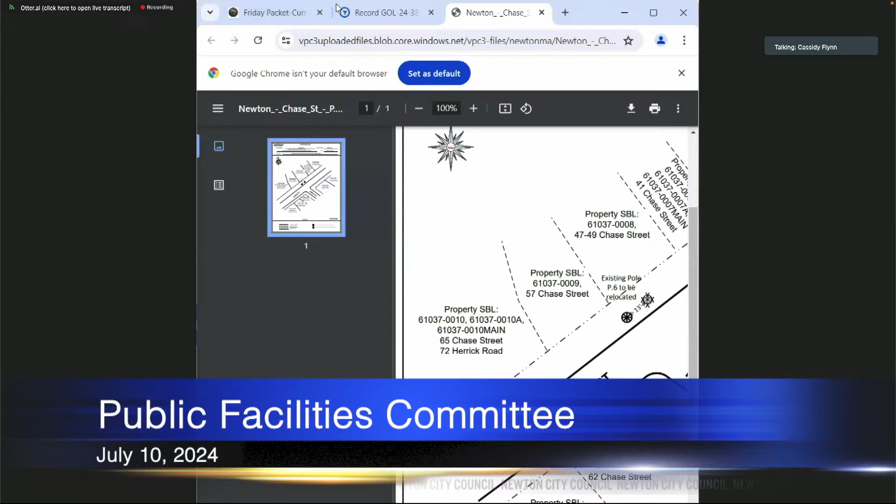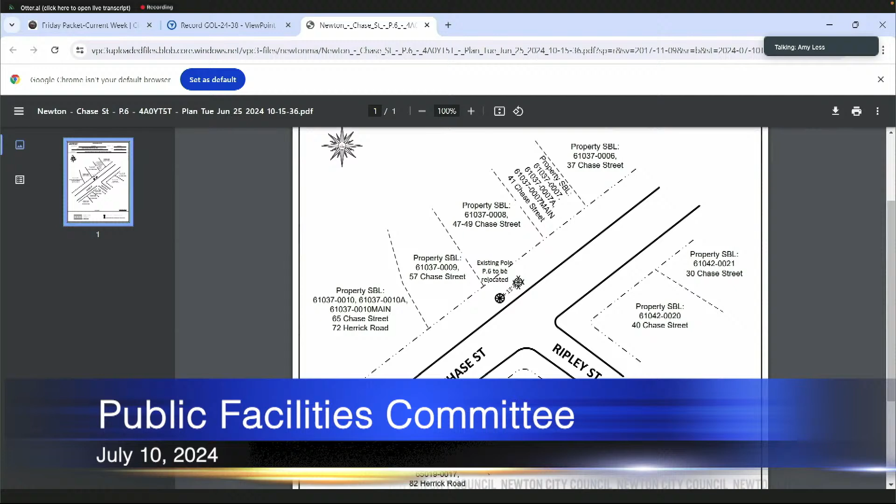It's hard to read, so it's moving further away. It looks like it's moving down to the east, if I'm correct—no, to the west, I mean it's going to the west. So if I'm facing the house, is that to the right or the left? Is it moving towards 41 or away from 41?

I don't know, can you tell from that map which way it's going? There's a little arrow that points—it looks like it's directional. I think it's going towards her house.

Yeah, that's an issue because we already have one that's on the other side of our house, and we really don't want one on each side of our house.

It's moving away. Yeah, I'm moving away? That's what it looks like. Okay, I can't see because it's too far away here. You see the project—is it going to the left or the right of the project?

It's moving away, it looks like it's moving away. It's currently almost across from Ripley and it's moving the other way. Yes, yes, okay. Does she see the screen? Yes, I can. Okay, I can see where it is.

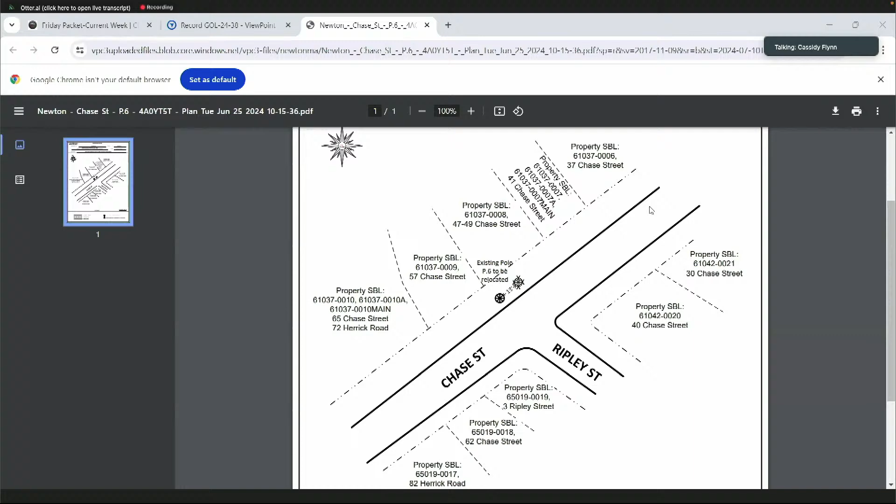Okay, so are you all set? If you're facing the project, it's going to the left. Okay, Alex, did you want to say something else? No, I just wanted to confirm that it is moving to the left and it's still going to stay in front of 47, 49.

So is there anyone else who would like to speak on this particular project? Okay, I think we can close the public hearing and bring it into committee.

And is there anyone that has questions or comments about this? Councilor Danberg. Thank you, Madam Chair.

This is the first I'm hearing about this. I have seen a previous version of this project, and this version has changed considerably. There was no request for movement of any pole in the previous project, and I have not been contacted at all by the developers, and found out via my Friday packet that this was even an issue. So I need to contact other neighbors. I need to know more about this project, and I think the neighbors need to know more about this project.

So I'm going to move to hold on this tonight because I feel that we don't have enough information to move forward. This is not about that project, this is only about moving the telephone pole. Yes, well, the moving of the pole is a part of the project, so I don't feel that we have enough information in order to make the decision on moving the pole, because the pole only needs to be moved in order to accommodate a driveway that has been moved on the project.

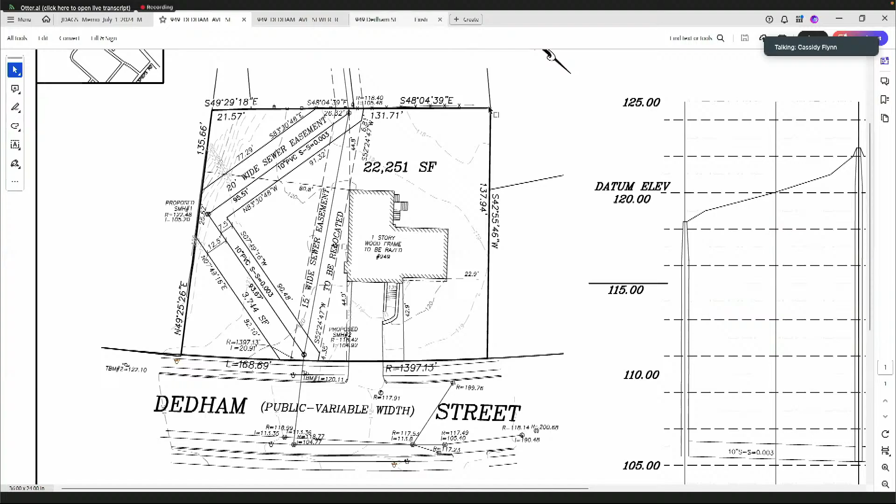Okay. The next item is 293-24, Eversource Energy petitioning for a grant of location to install and maintain approximately 378 feet of conduit westerly from the new manhole MH 32297 at the intersection of Auburn Street and Evergreen Avenue to support the MWRA tunnel boring machine project.

Who is here to speak for this one? Is there somebody here from Eversource? Usually it was Cal.

Mr. Daglian, do you have information on this project? There was backup material. Yeah, sorry about that. Yeah, so Eversource is requesting the location of a manhole and a couple of 100 feet of conduit. The only concern that we have is that DPW just recently installed a raised crossing there.

We asked if the manhole could be moved closer towards the Auburn Street intersection to avoid digging up the raised crossing and to relocate the conduit if they have to go to the pole. If they can't relocate it, then we expect that raised crossing be reconstructed to our standards.

So would you feel comfortable just putting that condition, or should we wait until someone from Eversource is actually in the room? I would be comfortable with that condition. Okay. All right. Councilor Gentile?

So unfortunately, the councilor from Ward 4 is not comfortable with that, just adding that condition. As Mr. Daglian points out, we just literally within the last week totally replaced that traffic calming situation.

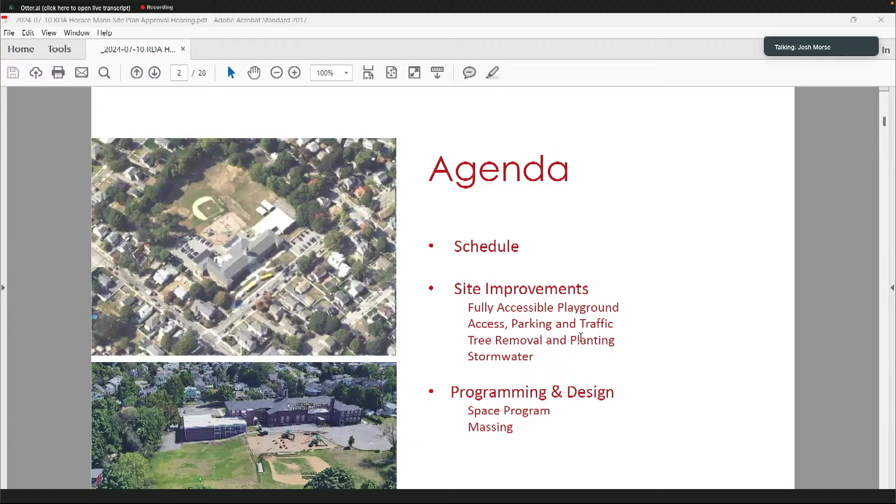I'm actually going to take you through the presentation tonight, and if we get into the weeds too far, I'll kick things over to Steve. So with that, I'm going to share a screen. All right, can everybody see that? Good. I'm doing this in PDF as opposed to PowerPoint because the PowerPoint is pretty large and it buffers a bit. So this evening, we're going to touch upon the schedule, our site improvements, and our program and design.

So overall, our project schedule, where we're at right now, is the red box right here. We are in July of 2024. Provided that the site plan approval process goes smooth, which I hope and believe it will, we will begin our construction documents in October. We will bid the project next February and start construction in April of 2025. Construction will continue through the end of the summer of 2026.

During construction, the Horace Mann School is going to be relocated to 191 Pearl Street, the current Lincoln-Eliot School. This was a process that we worked with the Horace Mann community and staff on, and just recently Superintendent Nolin accepted my recommendation, which was a culmination of a lot of work and input from the building committee and from others, both at Newton Public Schools and my staff. She concurred with that recommendation and presented it to the school committee just in the last couple of weeks.

So we are going to move them temporarily while we're in construction. We're not going to move them this April, just to be clear. We're going to get a jump start on some of the site work. They would move at the end of the summer of 2025. They would be out of 225 Nevada Street, the current Horace Mann School, for one school calendar year. Then we would finish our work the following summer and move them back in advance of the 2026-2027 school year. So that's our project schedule.

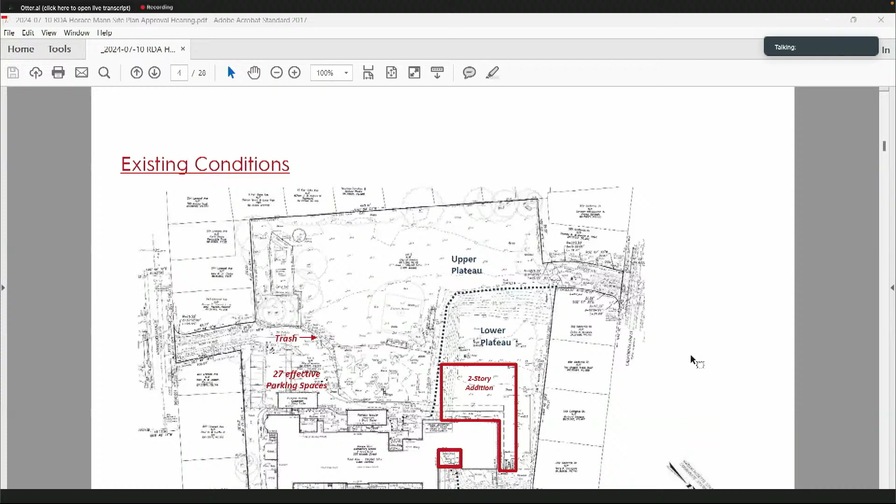So this is our site survey, but really the important part of this slide is it puts in your face where the addition is going to be. We started early on and looked at a lot of different options. It became clear quite early that the best possible location for the addition is what some people refer to as the bowl, if you will. There's a lower portion shown as a lower plateau on the site plan here. The upper plateau is kind of the fields - you can see the baseball diamond. This is the existing playground, the staff parking lot, and this is the rear of the building.

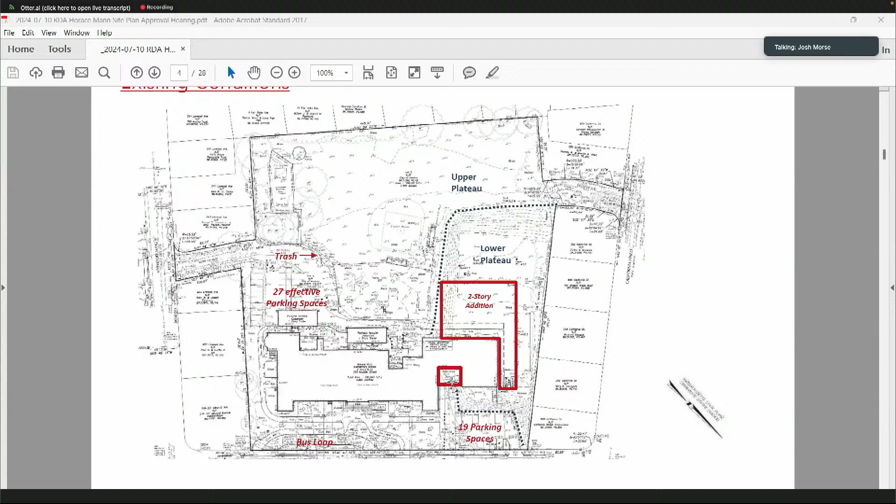The lower bowl is actually good for a few reasons. It works programmatically, but it also, from a massing standpoint, because it is set down lower, has far less impact on our abutters. There's a pretty healthy grade difference, not only in this lower area, but in the transition to our direct abutters. There's also a small addition to the front, and this will make more sense when I show you the renderings, but this allows us to make our transition into that portion of the building.

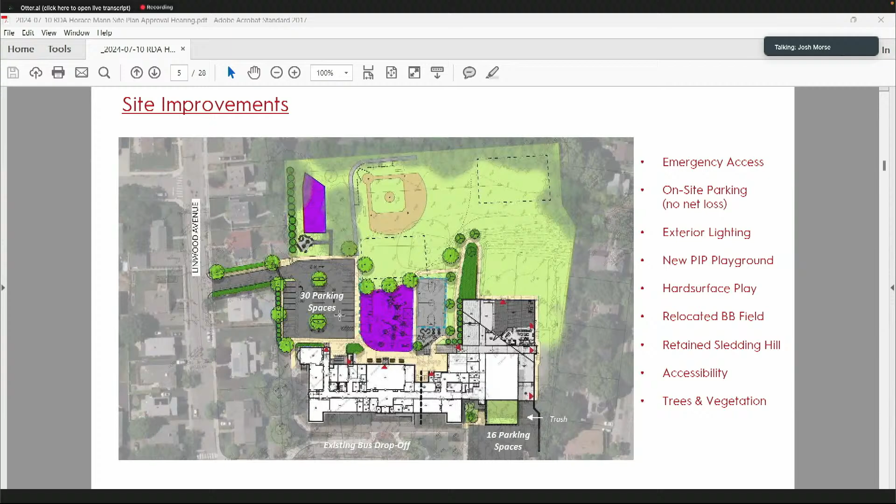So, site improvements—there are some high-level takeaways, but first I'll orient you. Linwood Avenue is on the left, and Nevada Street is out front where the existing bus drop-off is.

This is what we're proposing. The staff parking lot has 30 spaces in the rear and 16 spaces in the front. You'll note on the right, no net loss of parking spaces. So that was extremely good.

The playground in the upper left-hand corner is existing, to remain—it was recently done. The large purple playground in the middle is going to be a fully accessible new playground with sports surfacing, very similar to what we've done at our recent elementary schools, and what we're planning for Lincoln, Elliott, Countryside, and Franklin.

Some other attributes that I think were good about this: we were able to flip the ball field. This was beneficial because it allows a larger portion of the green space to be available for Horace Mann recess time. In inclement weather, the infield gets kind of muddy, so it was actually better for Horace Mann to have that flipped.

Over on the bowl, we heard from the community there was a desire to maintain the sledding hill. Certainly it's not something we're thinking about right now, with it being 92 degrees and quite humid, but it's something that is near and dear to their hearts over there. So I think that was a positive for us to be able to sustain and maintain.

We have improvements to exterior lighting and hard surface play. Another thing important to the Horace Mann community was getting a full-size basketball court here, so we're able to achieve that, as well as some other hardscape play areas that you see at our other new schools.

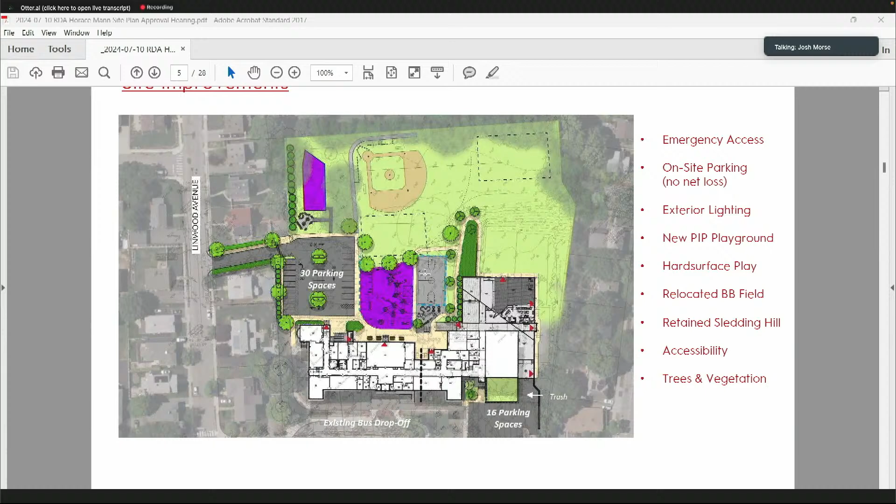We have a pretty good landscaping plan. It's a combination of creating visual screening and buffers with our abutters, but also creating opportunities for some natural shading, especially along the playground here. We think that's going to be a beneficial element for the site. I think that's the big stuff on that.

One of the things we'll take a look at during this process is the Linwood Avenue access. In the upper right-hand corner, you can see it's a narrow access point. This is for the staff parking lot, but it's used by students walking or biking to school, and it's also used after school. Right now there's no dedicated sidewalk there—it's a little narrow—so that's one of the things we're going to be studying and considering.

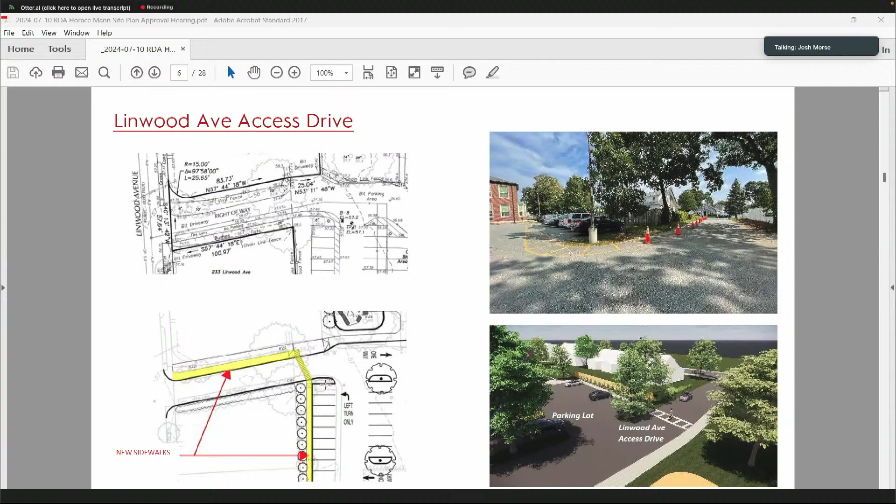You'll see in the bottom left-hand corner the creation of a sidewalk, crosswalk, and then a sidewalk that continues onto the site. That'll be something we continue to study as we move into design development and construction documents.

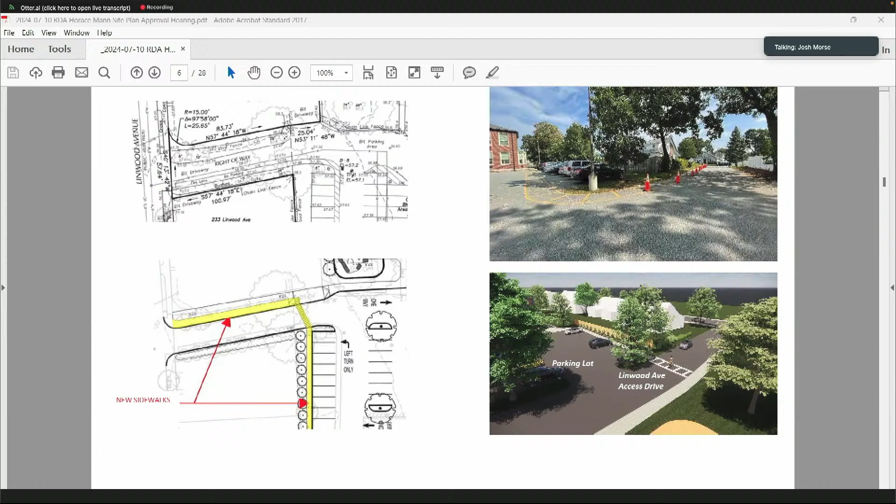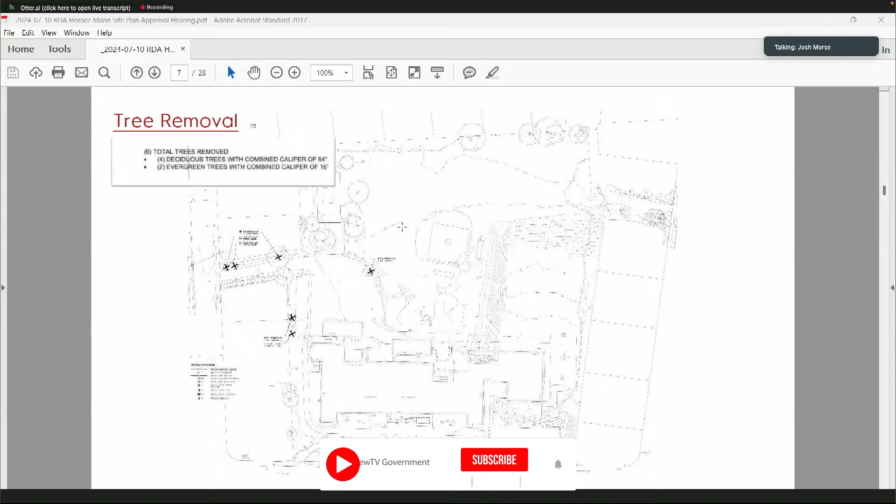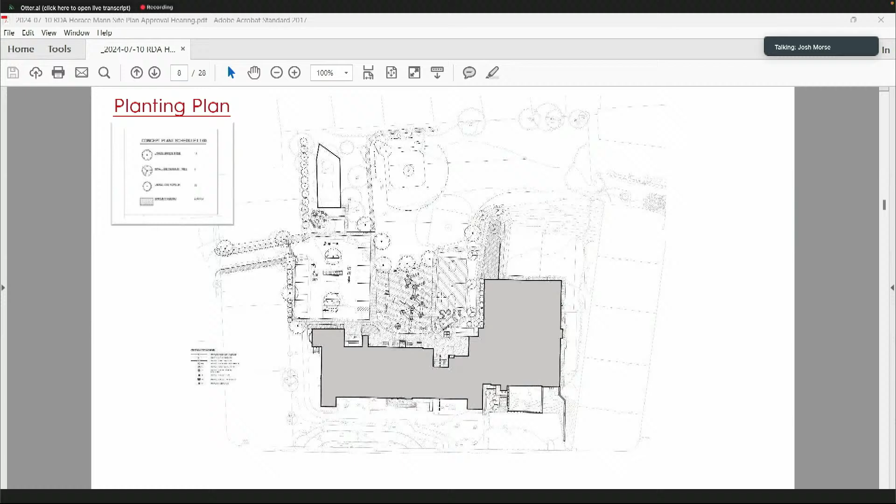Mr. Morse, can you possibly make that screen a little bit bigger? It's hard to read on our end. Absolutely.

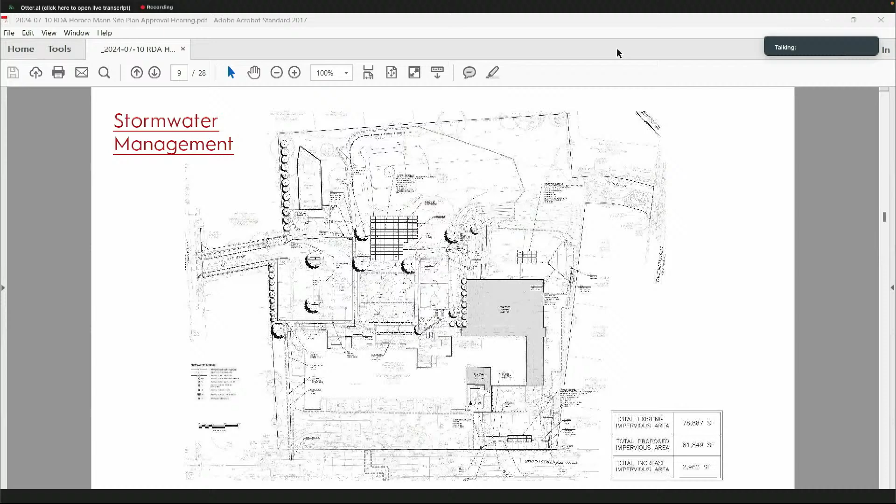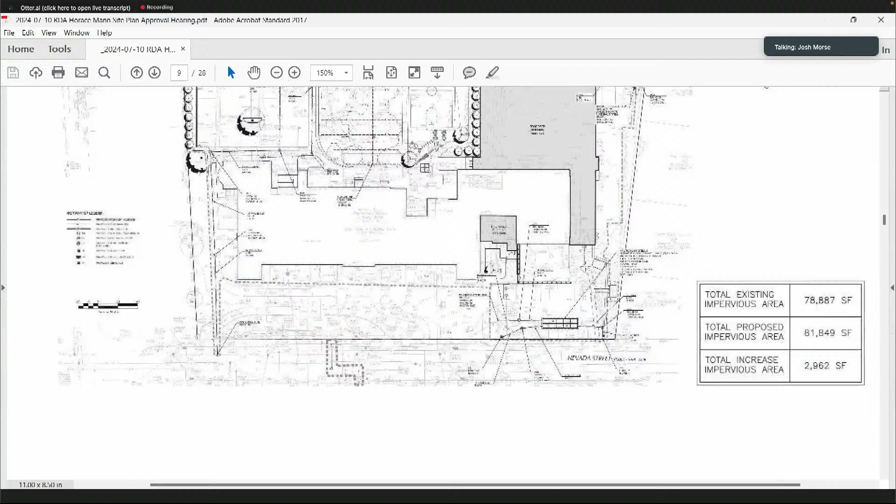The resolution on this isn't wonderful, but if you have specific questions about what any of the fine print says, please let us know, we can give you the specifics. Now I can read the numbers. Okay, perfect. Good. Thank you. Go ahead. You're welcome.

Actually, I'm going to zoom out a little bit for this one. I can always zoom back in.

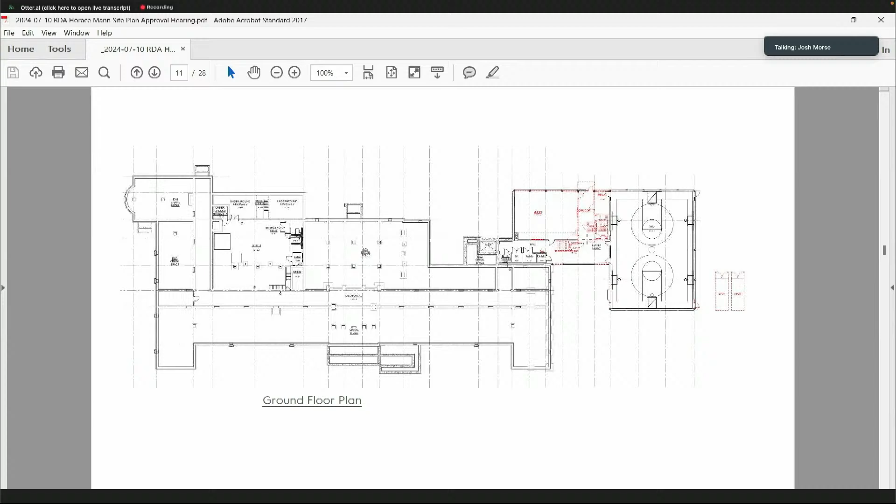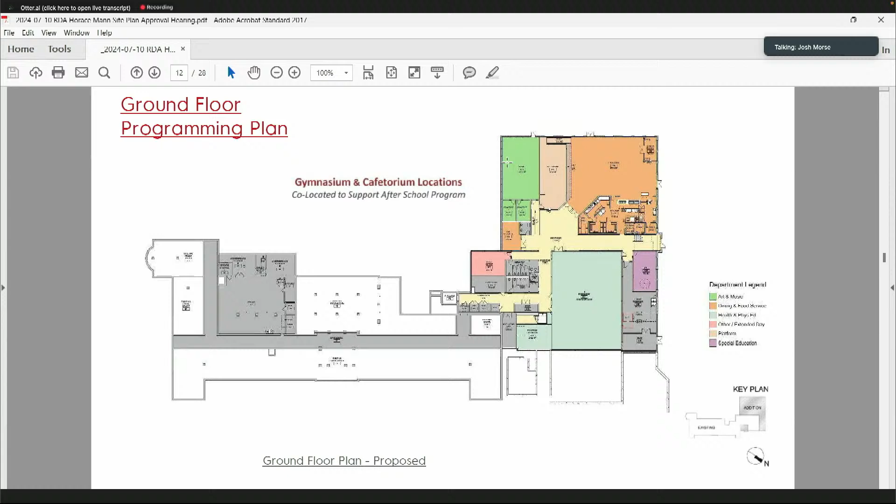So ground floor plan, this is the addition, and I'll walk you through the primary spaces. The upper right-hand corner is the cafetorium. You'll see this is our kitchen area directly next to it. The cafetorium comes up to the stage, and the green space just adjacent to it is the music room. I will make this a little bigger.

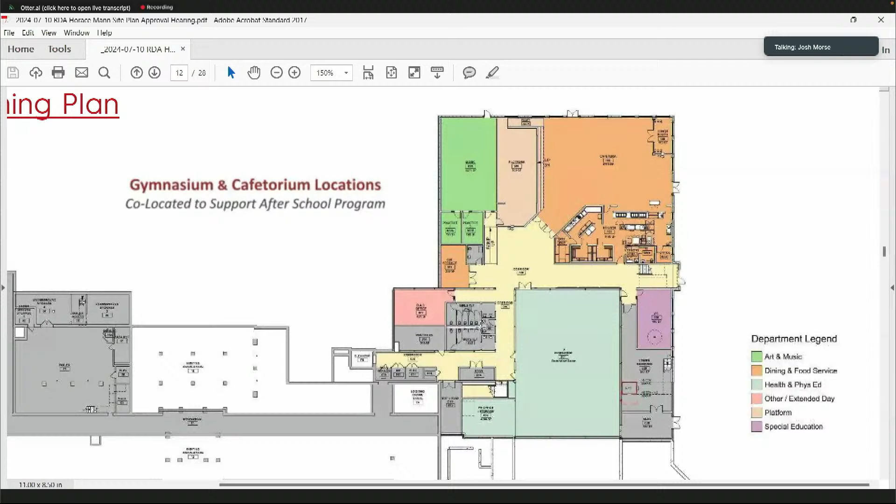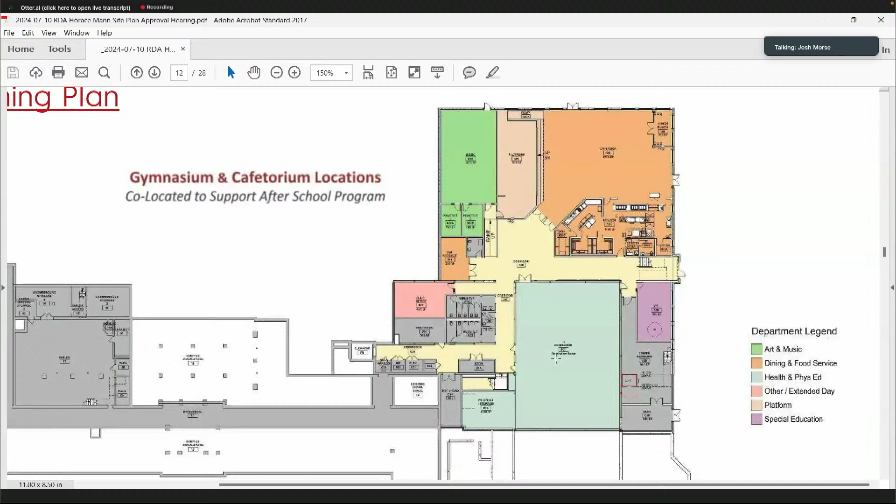You'll see that this is the existing gymnasium. We're creating PT space, obviously a lobby. The music room has practice rooms like you've seen at our new schools. We have additional restrooms, after school space, and additional support spaces here. One of the things that was important to us with the gym is creating a PE office and adequate storage, because there are currently storage containers outside of the gym at 225 Nevada, and those are going to be removed. But those were born out of necessity - there's not enough PE storage space, so that's one of the things we will be correcting.

Going up to the first floor, we've got a little more demolition that we need to do here. I'll walk you into the building. When you come in the main entrance, you're now in the lobby, your admin is right to the right. What you currently are looking at is the cafeteria, and for those of us who've been around a little while, that used to be the auditorium. What it's now going to be when we're done is the library, the media center. It's carved up a bit today, but this is going to be a wonderful space when we're done. So you'll see that we are opening up the corridor walls, we're opening up the space, and this will be transformed into a very nice media center library space.

Modulars are up top - these are obviously going to go. Over on the left, we have a little bit of, you'll start to see where we're separating walls between classrooms. This is so we can meet those MSBA space guidelines for classroom sizes. Some of the other modifications or interior demo is so we can create not only support spaces, staff and student support spaces, but the clustering of these grades and creating those project breakout areas.

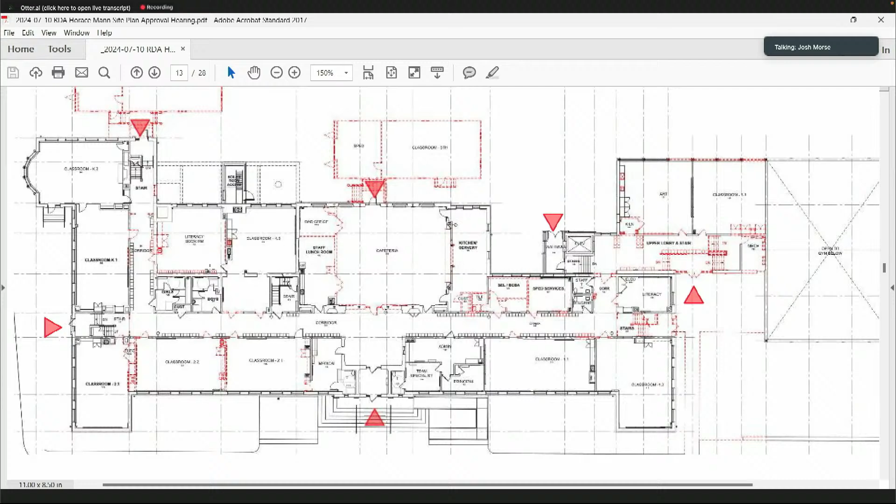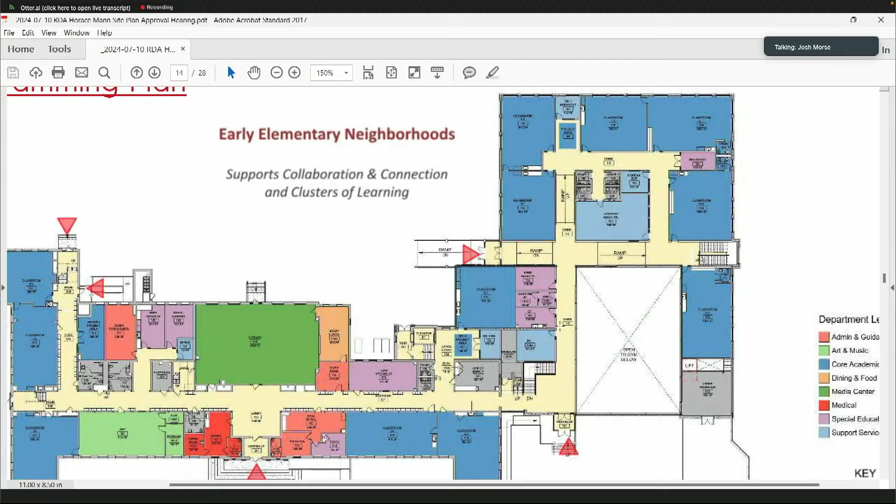Coming up to the first floor plan, on the addition side, you can see we're creating basically a horseshoe design. When you enter through the existing building, you'll come out to the clustered grades we want, with 3 classrooms in a project area, 3 classrooms in a project area, and a literacy space in the middle. Same thing - we've got special education and student and staff support spaces sprinkled in as well, in the addition on the first floor.

And then in the existing building, you can see that our demolition has allowed us to start to right-size these classrooms, create the project breakout areas, which creates this sense of grade level community, create more of our special education and student support spaces, and really align the building from not only a flow, but a space adjacency standpoint that makes a lot more sense.

Here you'll see the library I was mentioning - this is going to be a wonderful space that will really anchor the existing building. And then in the addition, I really think that cafetorium is going to anchor that space out there. Staff room and some conference rooms here as well. So the first floor is coming along great.

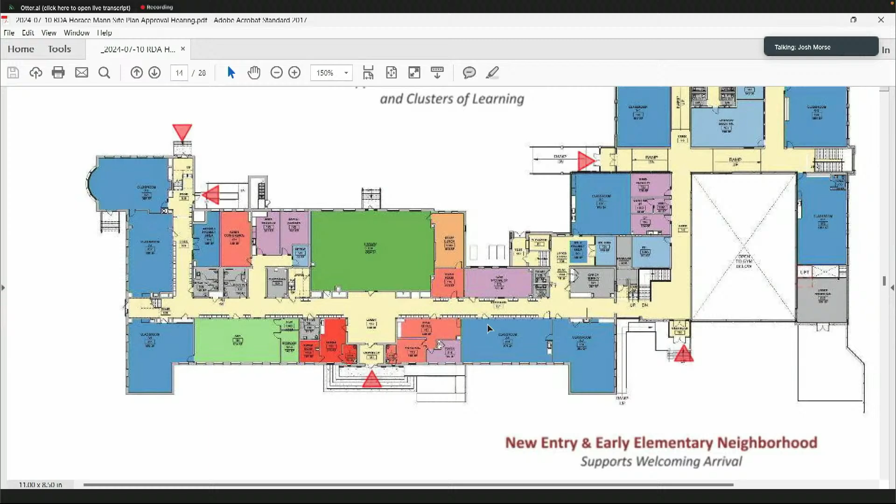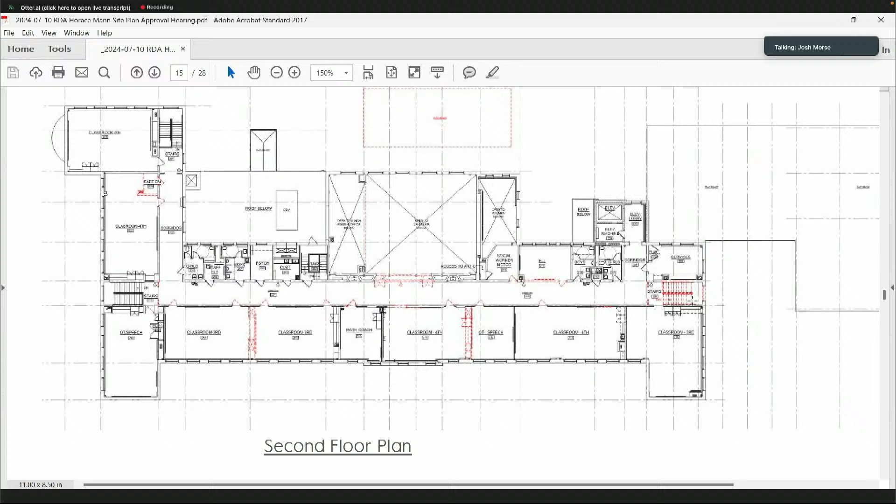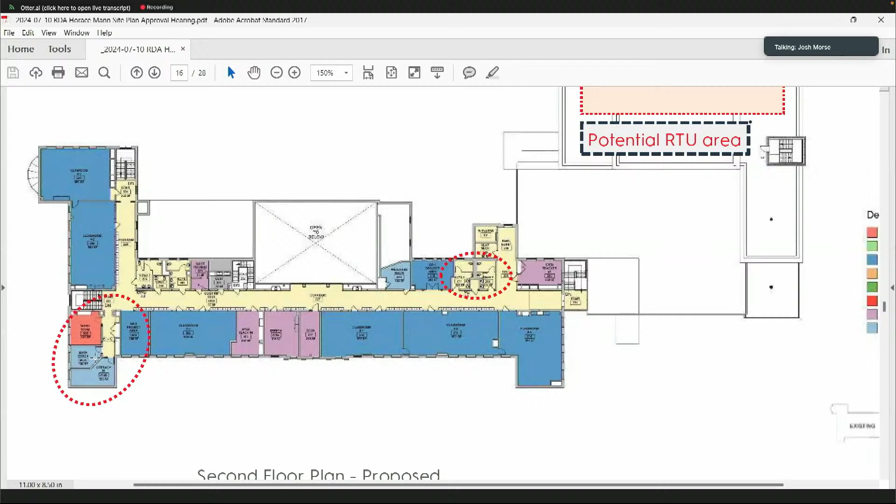You'll see over here in the addition, at this level, this is the rooftop. This is where we're going to have photovoltaics as well as our rooftop HVAC equipment. We've also done a little bit of work lately on this floor plan to improve our restrooms and some of these small support spaces.

You'll see that not only in this addition, but we've got some work that we've done out front here to create an accessible entrance, and to help define this space a little better.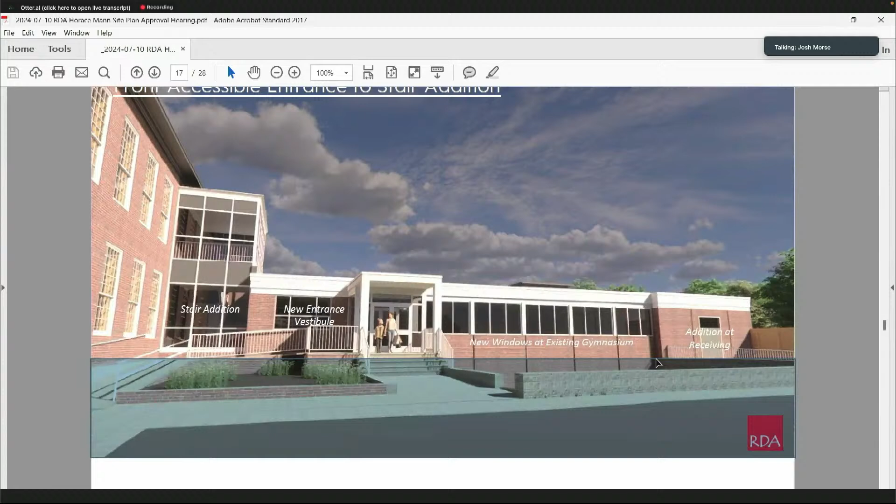We're creating a small addition over here for the receiving area as well, which is really important. That will allow us to move everything to this side so that we're not having dumpsters and deliveries in the back of the building near the playground.

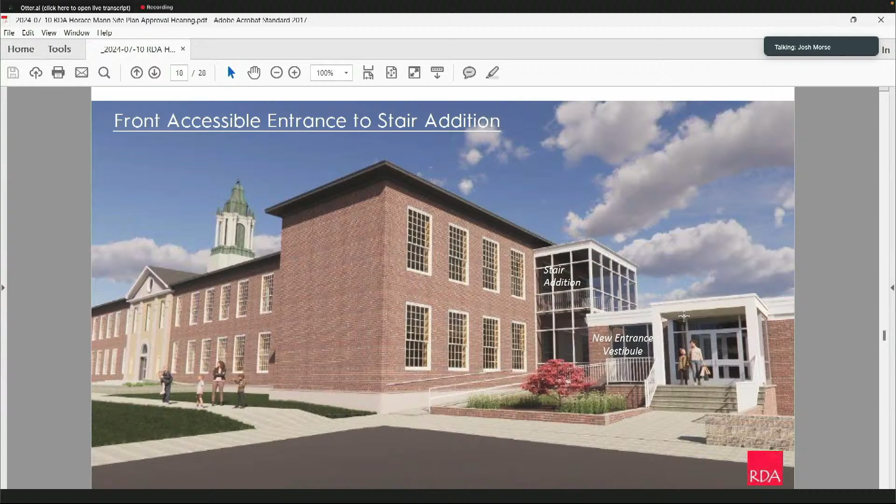So a slightly different vantage point here. You can see the glass connection and the existing historic building. One of the things we did—folks may have seen some earlier renderings—a few of those options really created a very stately entrance down here. It was strong, and quite frankly a little too strong. It took away from the historic nature of the existing building, so we softened this entrance a little bit, and I think it looks a lot better.

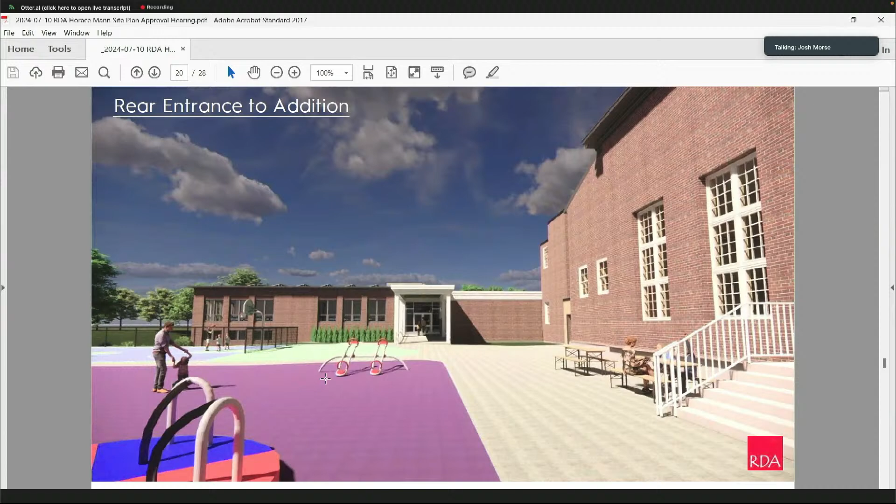This is with your back to the staff parking lot. The area to the right is actually the library that you'd be looking out into the playground from, or into from the playground. Straight ahead is the addition—this would be the entrance to the addition in the back. Off to the left is the basketball court, and then the lower plateau just beyond the fence line there. These are not the exact play features we're going to have in our playground.

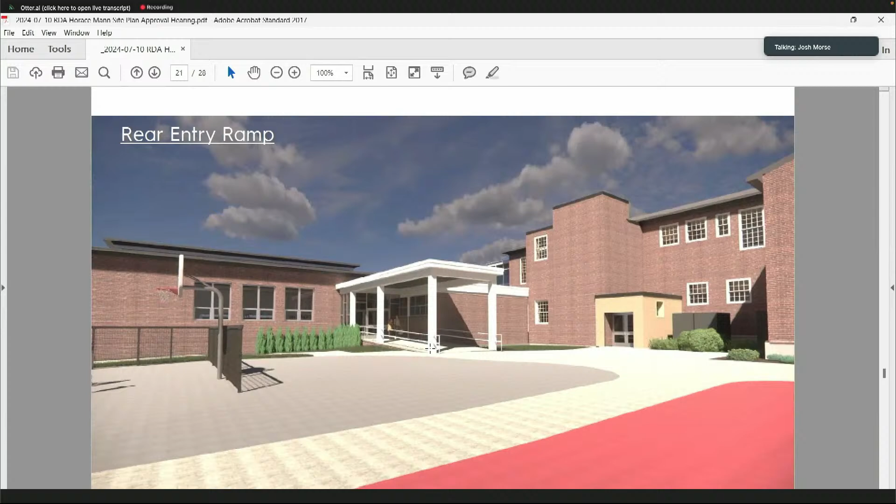Slightly different vantage point. We played around quite a bit with the height of the addition to try to make this transition as smooth as we possibly could. Some earlier options showed a much more dramatic series of ramps because the addition was significantly higher. By lowering that addition and tightening it up, it not only became more efficient, but the transition was not as great, allowing us to do a much more gradual slope up to the building.

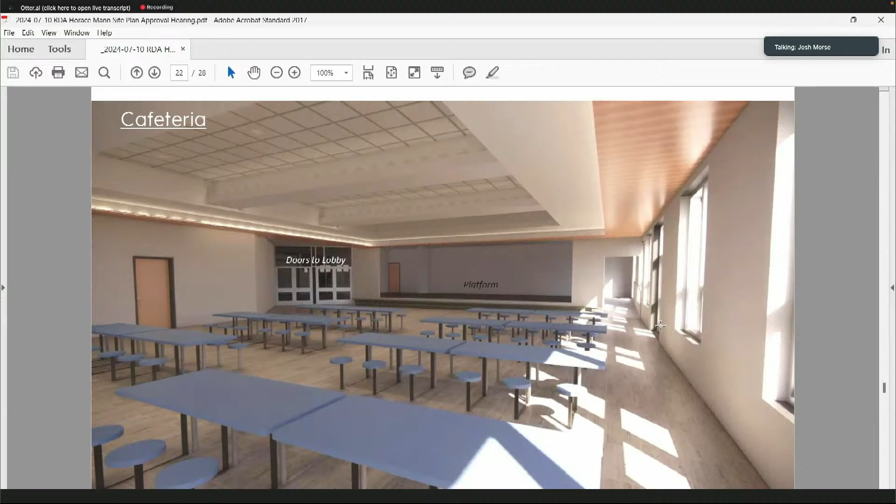This is an opportunity for students who maybe need a quieter space to eat, can go in there. But it's important to us that this maintain transparency and kind of openness. We want a space where it can be a little more quiet, but we don't want people to feel isolated either.

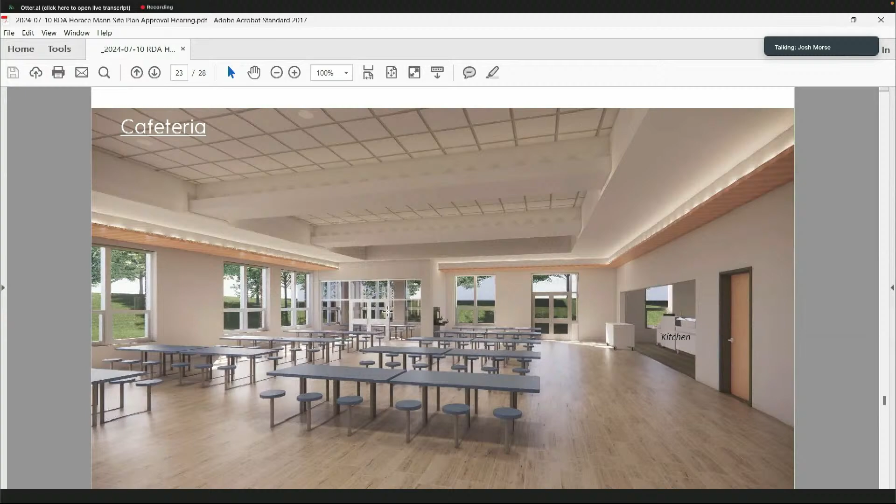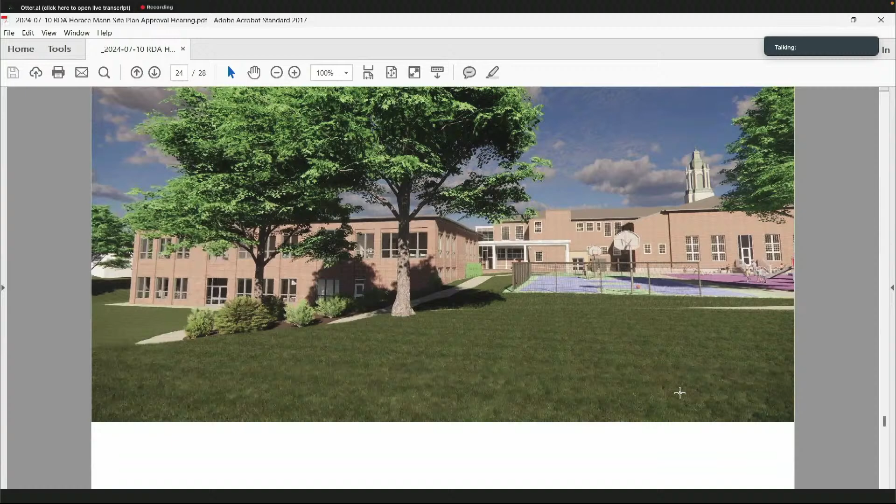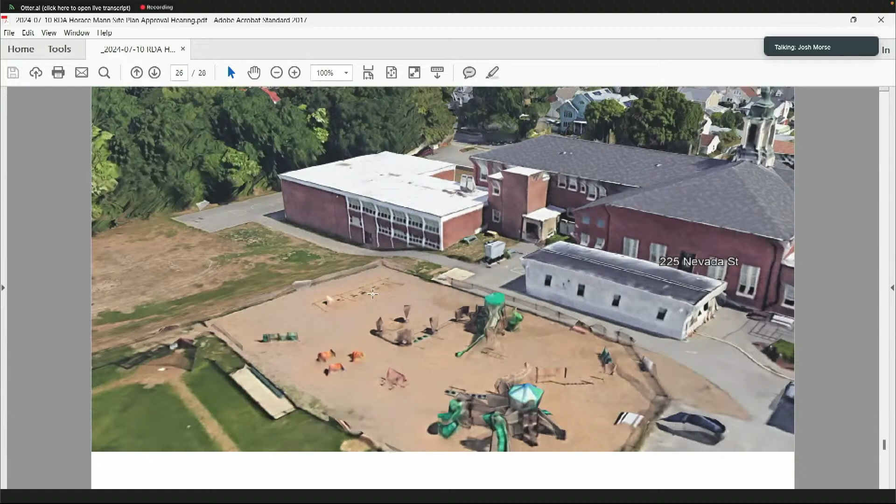Another bird's eye view of looking down at our new site. And that is that - I think what I'll do is stop sharing. I see a hand up, but I'll turn it back over to the chair for any questions from the committee.

I just had two, so I think you answered one question - it's a two-story addition. It is in fact, yes. And the new entrance that you showed us, is that a new entrance to the school, to the whole school, or are you abandoning the original entrance?

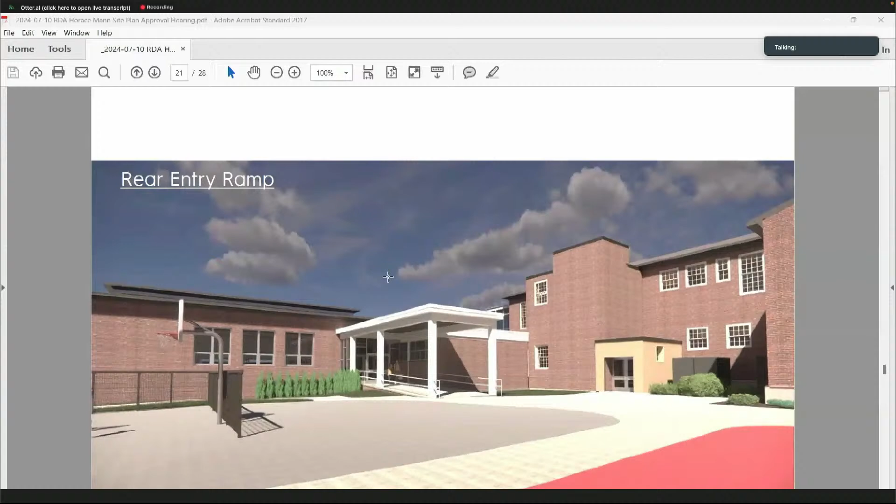Oh no, actually let me share screen again, because I certainly don't want anybody thinking that, and I definitely don't want the Historic Commission thinking that. So what's happening here, the main entrance is off to the left here, and this is going to be our main entrance, period. There's no question about that.

There is an entrance that exists today where this entrance is located, but because we're having to work with the interior elevations to make our horizontal transitions into the addition, we had to kind of blow things up a bit and reset the height of the entrance at this level so that it worked, so it aligned with our floor level, our new floor levels, both in the lobby and then into the addition. So this is going to be an entry point.

It allows, I think, a few things. One, Mark and his team, Principal Nardell and his team, are going to continue to use the main entrance as the main entrance. But with grade levels at different areas, there are times where it makes sense to have different grade levels come in different doors. We also learned through COVID that separating where students come in can be beneficial at times so that we don't have everybody congregating in one specific area. So it provides a little bit of flexibility, but I certainly don't want anybody thinking that the main entrance isn't going to continue to be the main entrance, because it definitely will.

Thank you. Are there any questions before we open the public hearing?

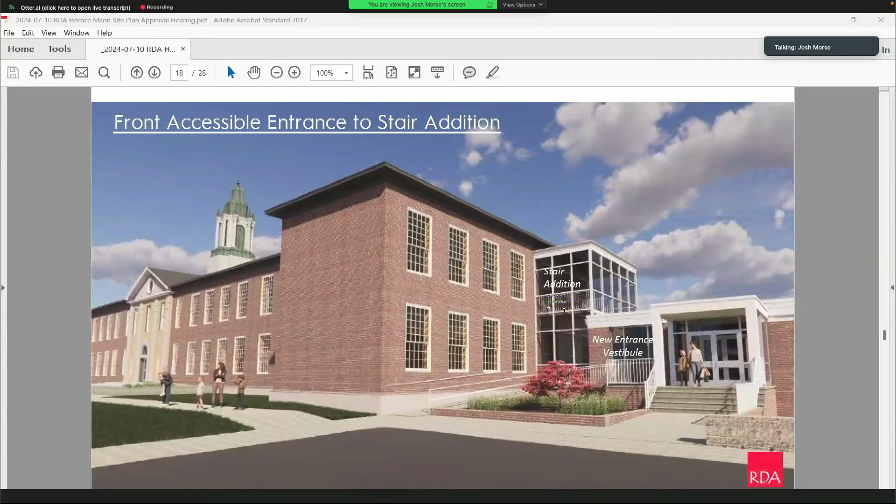President, just a quick question on the opening - is the principal's office going to be near the main entrance? Yes, so the principal's office is going to remain at the main entrance. Right now this is the main entrance right here, and the principal's office, the whole admin suite's right here.

And are there any safety or security - I realize it's all about balance, but are there any safety or security concerns with having other entrances into the school? I know for a while, at least, it was much more of a tendency just to have a single main entrance - obviously ability to egress in case of an emergency or fire, but to funnel everyone through one entrance.

Yeah, it's a great question, Counselor. So I would say in general, we still want our schools to have one primary entrance, but having that flexibility is beneficial. What I've seen is that each school is a little unique. Take Zervas, for example - it's got a dual entrance system where students can enter from the back of the building as well as the front, and it has good direct lines of sight from the main office.

So they'll actually use both entrances. At a school like Horace Mann, what I would envision is they use more than one entrance, but they use staff to monitor those. It doesn't mean the entrances would be left open.

Folks would need to enter through a staff door, or if it were closed, they'd be buzzed in through a camera system, so there's still a level of control. Once we outfit these buildings with what they need, off hours, even though staff can buzz people in from different locations, they'll oftentimes hang signs saying please come around to, in this case, the Nevada Street main entrance, so they have that increased level of control and security.

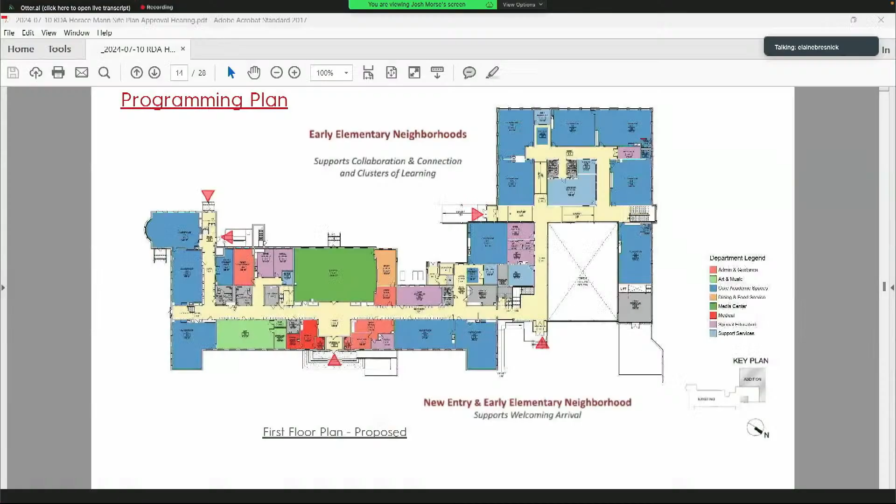First, I'd like to know what the plan is for the area right against the chain link fence that divides my property from the schoolyard. Some of it has been taken down, but there's an area of big old trees which provide us a lot of shade, but there's still plenty of brush there, an old fox den, and a number of other sundry things. So that's one question, what's going to happen to the rest of that property up against the fence?

My second question is, we had been told by someone, about a year ago, that the Wyoming Road Extension was planned as the construction access to the site. As an abutter, that is my driveway there, that's how I get out of my driveway. I'd like to know what we can expect and what your thinking is in terms of us.

Thank you, Elaine, both very good comments. On the first one, I might take you up on meeting you over there if you don't mind, because I'd like to lay eyes on the area specifically. Right now the project isn't carrying specific work over in that area from a landscape perspective, but we want to turn over a clean site that looks nice. So certainly if there are things we can do to improve that benefit our abutters and our school property, we would want to do that.

I'm retired, I'm here a lot, not next week, but let me know. I'd be happy to meet with you and show you. Perfect, you will see me, I'll be knocking on your door in just a couple weeks.

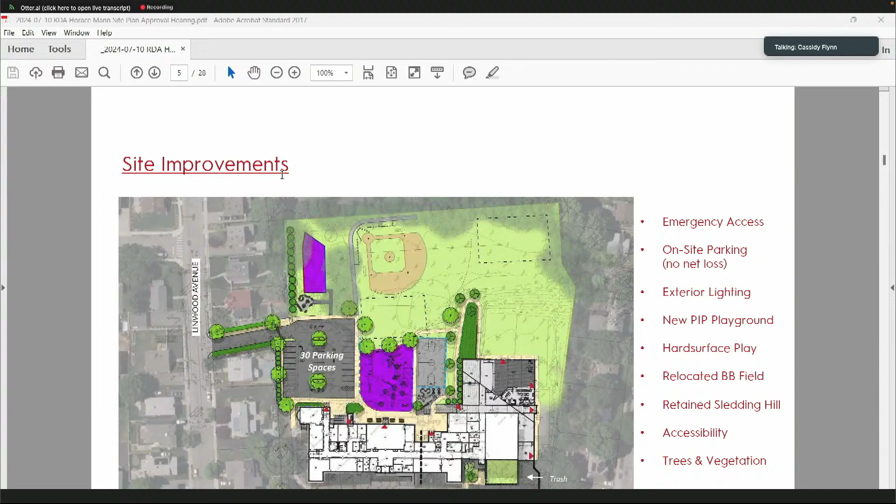It looks like the walkway, instead of people crossing over that right of way and coming into the school on the right-hand side from Linwood Avenue into through the back parking lot, for them to cross over from that sidewalk that's being proposed to that other side is going to be a real major issue, we're right there. I mean, I don't think I can even see or back up. Another aspect that I'm concerned about is I maintain all of those

trees and the landscaping and all the other aspects right outside, like on that right of way. So I'd like to have someone, I'm raising a concern about that since it's something that myself, I've been here for 12 years and my predecessors were there in the 80s, and we have all maintained the area for over 30 years.

I'm just confused about the area. Is that the area where those trees are coming out? Yes, yes, and the sidewalk. Okay, got it. Commissioner?

Yeah, so Amy, long time no talk. I was actually in charge with Alex Valcarce, we were in charge of the project back in 2014, so I think we actually talked many years ago. And some of this actually feels like deja vu because this was something that we discussed back then, but never really solved, nor could we kind of squeeze into the project at the time. So I am quite familiar with your access point there, and it does present some challenges, there's no doubt about it.

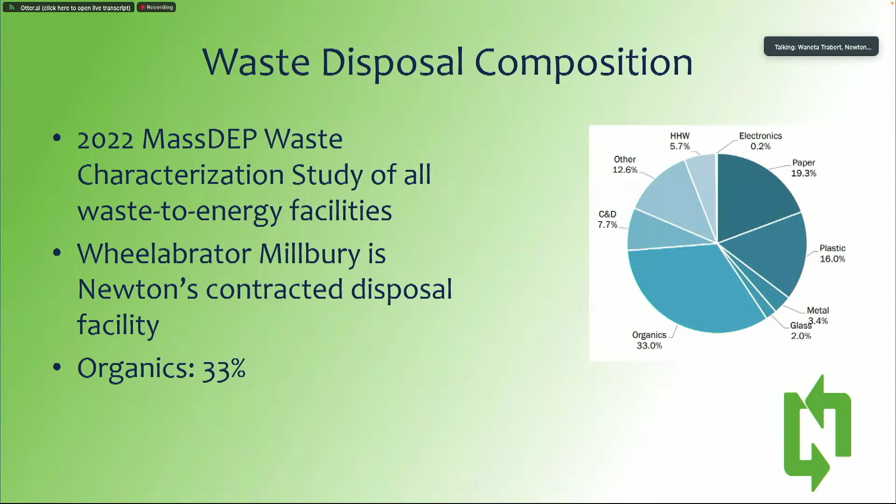In Massachusetts, we are facing a solid waste disposal capacity crisis. It's a slow-burning crisis, like many other crises. For context, Massachusetts has the highest tipping fees for trash disposal in the entire country, and that has been true for a number of years. Connecticut used to run toe-to-toe with us, but we have surpassed them in cost.

The Massachusetts Department of Environmental Protection develops a solid waste master plan every 10 years. They set goals that kind of set the baseline for expectations, and then municipal governments can either adopt these or work toward them in various ways with policies and programs.

Mass DEP did a waste capacity study in 2019 and really quantified this capacity crisis, basically that more and more facilities are closing each year. And when that happens, the trash that was going to those facilities now needs to go somewhere else. So the system is just very tight, and I would even call it fragile.

Ultimately, this is resulting in more and more trash that is getting exported to other states, which puts us in, I think, a precarious position. Newton isn't exporting its trash, but someday, years down the road, we might find ourselves with that being the only option.

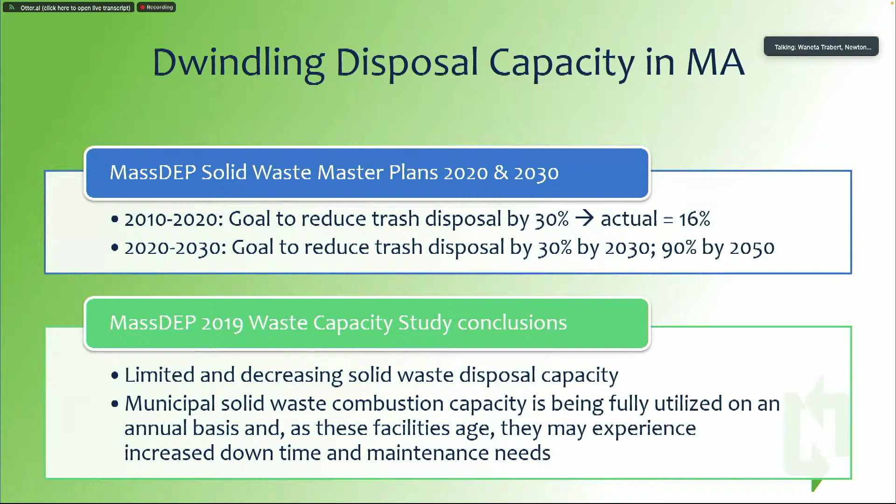Waste from Massachusetts is going as far as Alabama, Michigan, North Carolina, South Carolina. So it's really something to be mindful of and pay attention to more of the reduction side of the equation instead of shipping it further and further away.

So the impacts that Newton has seen on this capacity shortfall - we are currently in a 20-year disposal contract with the Wheelabrator facility. That contract ends on June 30th of 2028. There is no such thing as a 20-year contract anymore. We do have quite favorable terms right now compared to the open marketplace.

The longest contract terms are now 5 years, which is not surprising because things are evolving more quickly. Vendors are not willing to commit to longer than 5 years because there are so many variables that can change. Again, if one facility were to become obsolete or need to close its doors, it would really shift the supply and demand of the entire system.

And we've seen disposal costs in other communities that have increased by 40 or more percent in long-term contracts that they've entered into within the last 1 to 2 years. So it's certainly something that we're paying attention to, and I'll get to more about where we're at thinking about the 2028 contract ending in just a couple of minutes.

So with recycling markets, this is always kind of another point of interest. I like to highlight that mainstream stories in major news outlets that recycling is broken or pointless are grossly exaggerated and sensationalized. I will fully be the first in line to say that the recycling system is flawed, but it is functioning. It's not going to get us to zero waste. We can't recycle our way out of our waste problem, but it is still a much, much better option than disposal from an environmental perspective.

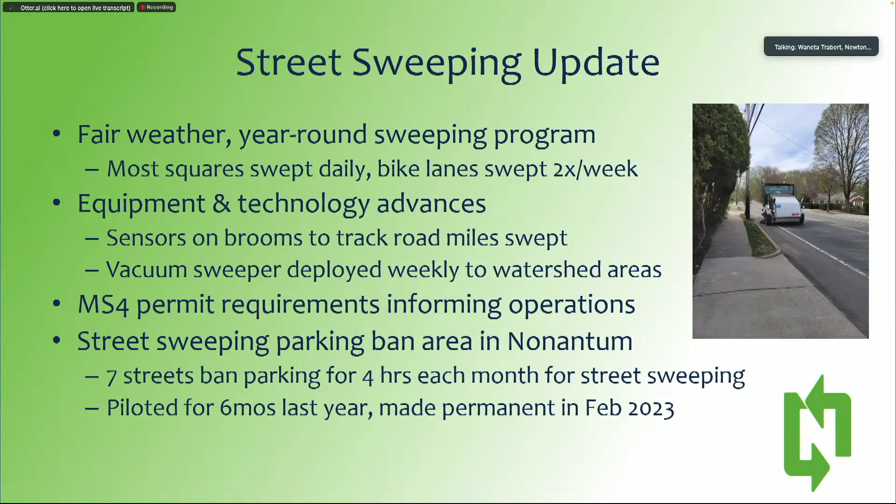We receive grant funding from Mass DEP. They have a pretty robust grant program for municipal governments. The most notable one is the Recycling Dividend Program, which is an incentive program based on best practices that DEP has mapped out.

Municipalities can implement those best practices and earn points in different categories. I wanted to highlight that for the first time in 4 years, our anticipated award is lower than previous years. The previous 4 years it was $68,000 that we were receiving, and now it has come down.

The reason for that is that Mass DEP has raised their bar, trying to make it more challenging for municipalities to get those points and pursue what I'd call more advanced practices and policies in an effort toward waste reduction.

Some eligible expenses that those grant funds go to pay for include education and outreach programs, project-based temporary staffing, improving school recycling, and adding food waste diversion programs in our schools.

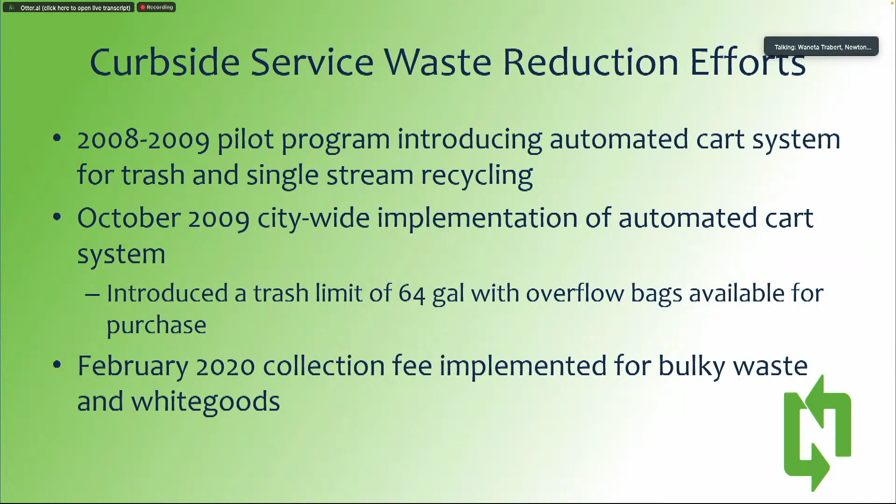So I mentioned before that the CART program was introduced citywide in October of 2009, and that introduced a trash cart limit for the first time in the city. The only other thing we've done system-wide since then, in an effort of waste reduction, is in February of 2020 we put a collection fee in place for bulky waste and white goods, which brought down the number of pickup requests tremendously, by about 80%.

I wanted to highlight our education and outreach efforts. We have an app, along with website tools and widgets on our webpage that are well used. We call it the Recycle Right Newton app. We have about 3,500 regular users, and many more folks just use the tools on the website.

We use our 311 system extensively for cart repairs, bulky items, and missed pickup requests. The great new platform recently launched, GoGov, allows residents to respond to requests, and the feedback we've received is helping us improve our operations and investigate what may have gone wrong if something was closed when the work wasn't actually done.

This summer we have a water bill insert going out, educating folks about household hazardous waste days, recycling, highlighting our app, and ways they can better manage yard waste and clear storm drains. We also have the Curbside Recycling Education Project. This is the 4th year of this project, and we anticipate getting all of the recycling carts decaled with this image in every cart citywide, finishing this year.